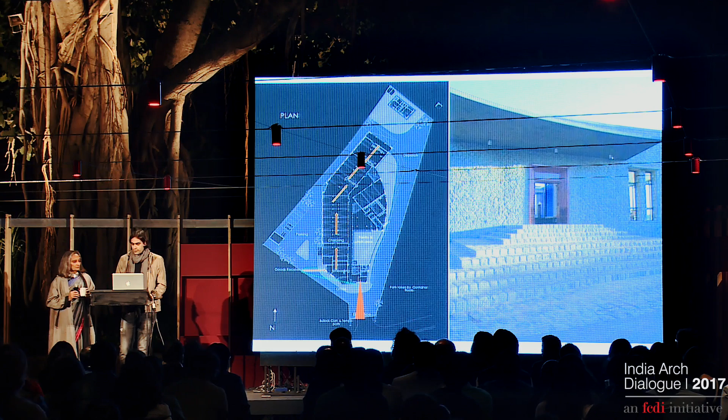This is an example of a bullock cart where some of the local materials were actually transported to site. And I think besides the understanding of devices and material, there was a very clear representation of a linear workflow and a functionality that's represented through the linear site and how material enters through one end, has a very logical movement through the space, and then exits as a finished product at the other end.

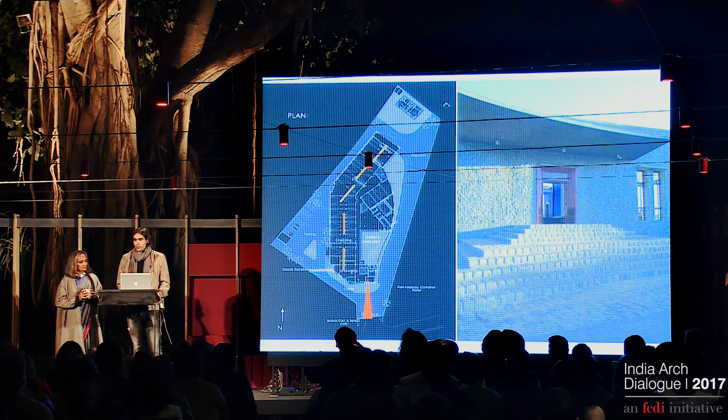The extensive use of the local rubble masonry, again, building with local material, with local labor, and the use of the traditional vaulted systems with the local terracotta bricks.

Again, when we come into, and I'm going to expand here, Shimul, sorry. We always consider industrial architecture and factories and warehouses to be the sterile subject, but when you're able to combine the functionality and workflows of those with a very strong connection to vernacular expression, you land up with some very, very rich spaces and solutions.

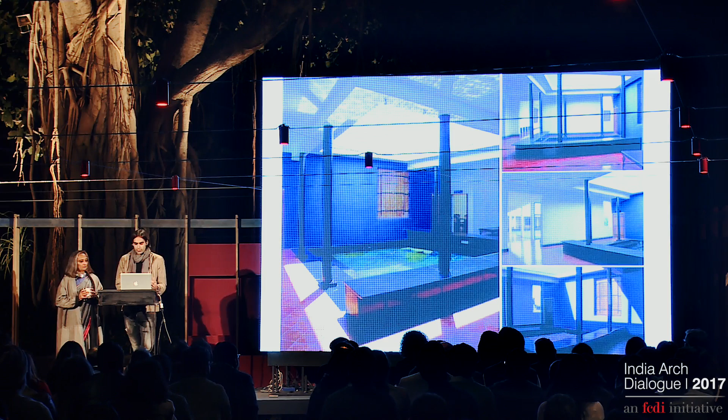And you can see that the courtyards that develop within the project, the way they bring light into the space, they create pause points. The water body is actually a rainwater harvesting mechanism, and it's quite wonderful, the quality of light that just filters into the space.

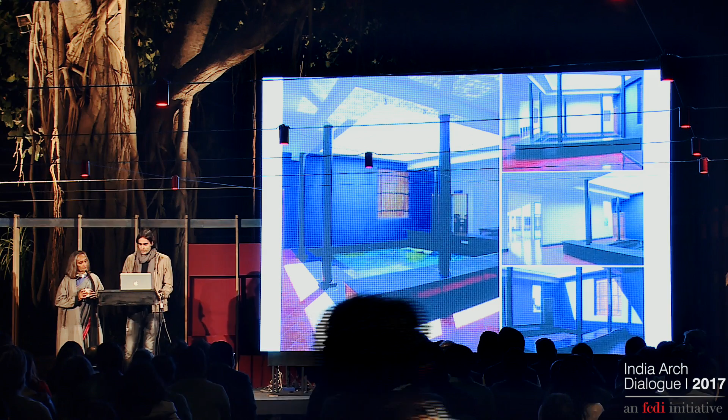On one hand, we had the rubble masonry on the exterior of the project, but towards the interior, where the human interface became more exaggerated, it was softer kind of plaster with cooler whites. Even the doors and windows were built with the help of local ironmongers using locally sourced wood. So everything somehow seems to stem from the region.

You can see the finished space where, with the monitor lights being very close to the equator, we know that the north light is something we need to harness within the internal space. But also ventilators would then exhaust the space and let the hot air flow out. So again, something that's completely sympathetic to the environment.

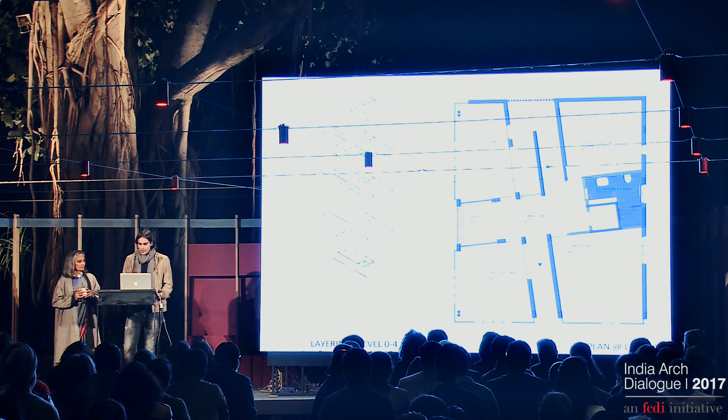It's an advertising agency, and I think somewhere there was a commonality in thinking that real creative thought and collaboration doesn't need to happen within walled rooms. It happens more in the central space. So you find people sitting on these steps, crossing each other, discussing ideas, little balconies overlooking the steps, and it becomes both a thermal device for ventilation as well as bringing light very deep into the center of this space.

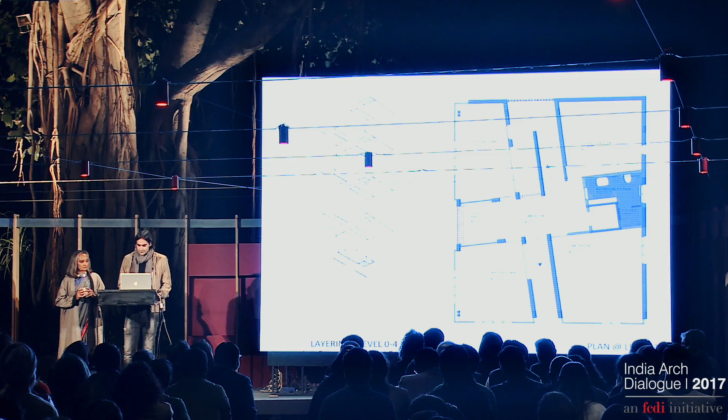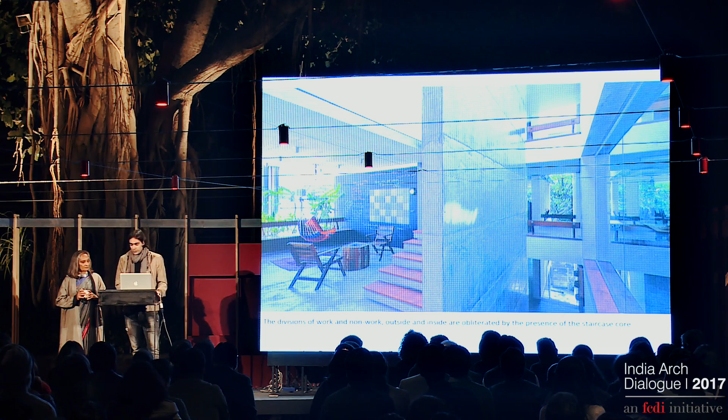The cast concrete walls become the primary structure of the project, so there's an honesty both of structure becoming the primary aesthetic of the project. No false ceilings, the slabs as they're cast are left as raw concrete. There's a certain amount of thinking and intensity and rigor that goes into even leaving these spaces exposed. So overall a certain honesty of expression, not relying on appendage and artifice to develop the aesthetic value of the project.

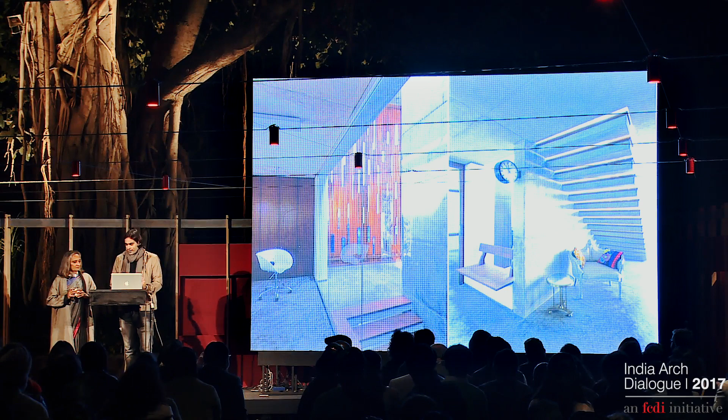You can see on the right the way the stairs are configured, a heavy material yet being quite light, and the way light filters through it. On the left, you can see a 16-foot tall jali panel configured with wood and acrylic, and each of these 6-inch strips are actually operable to again allow different conditions of light and ventilation to impact the building.

And that's one of the executive suites. You can see the beautiful trees outside. A very, very simple material palette in terms of the IPS floors and the raw concrete, the use of wood, the use of color through the upholsteries, the way the walls can move and turn.

I think that's something that's very strong about the practice. They have this wonderful ethos of detailing with simple materials, but with a very rich interpretation of tradition and craft that comes into every one of their projects.

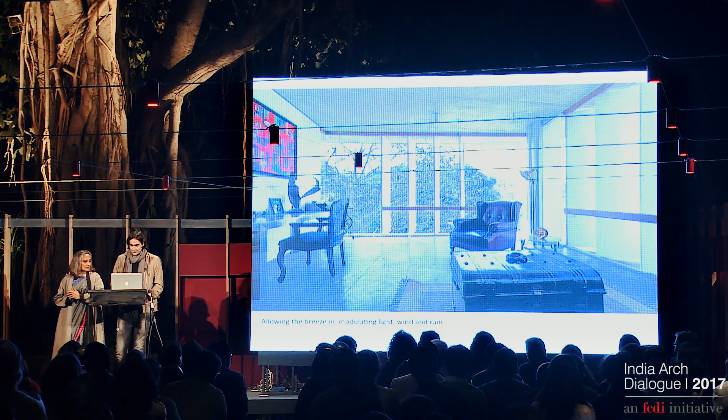I think, in a sense, an expression of the same. It's just the beautiful quality of space.

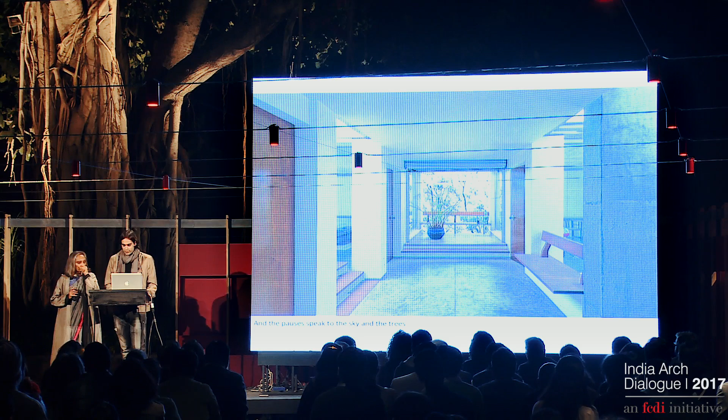The louvers were made out of acrylic polymer, a material that hasn't traditionally been used in an external wall setting. Four louvers open with one handrail and can be placed at different degrees. These wonderful pause points become an extension of the courtyard, where informal discussions can take place, and just quiet spaces for introspection.

Our office is such. We're here to work, and sometimes we do. We play FIFA or race a car, but you just can't blame us. Our office is such. Our days start at 12 and nights never end, with the wind so soothing and the place so pleasing. You just can't blame us. Our office is such. We are Nirvana Films, and we love our new office. Pure production bliss, now in a new outfit.

This project I actually know quite well. This is a house in Alibag. For those unfamiliar with Alibag, it's connected to Bombay through Navi Mumbai, but most people tend to access it by ferry, and it's quite wonderful to have that sense of departure from urban chaos into a more rural setting.

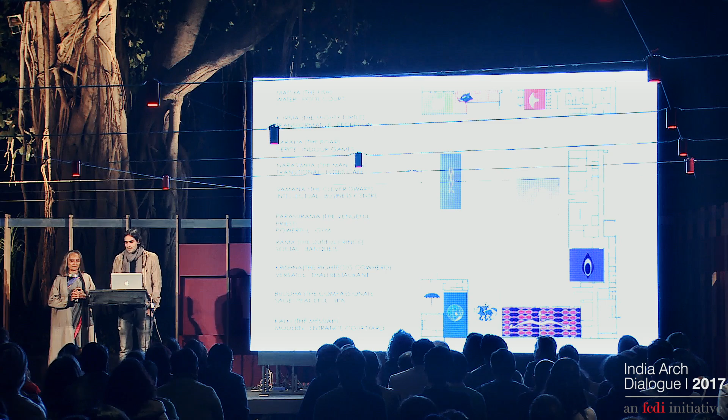This is, again, a very well-documented hotel, featured quite extensively. A hotel in Tirupati, and I think we're all quite familiar with the fact that a lot of religious pilgrimage sites are anything but catering to the idea of spirituality or the peace and introspection required of those sort of spaces.

They tend to become quite chaotic, and somewhere, in terms of trying to create a space very close to the pilgrimage site, the main Tirupati temple, we tried to create a space of reflection, tapping into both the spiritual philosophy of the space and the physical structure of the temple complex—being walled, introverted garden with orthogonal layout, circumambulatory spaces, with the center being a space of meditation, the courtyard, and especially the center being the lotus.

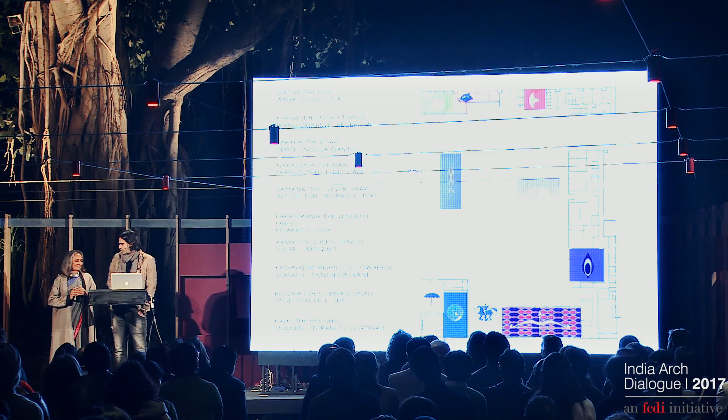There's a lot of significance in terms of the culture of that place and of the temple in particular. On the left are the 10 avatars of Vishnu, used quite subtly in the interiors to develop different devices and aesthetics for different spaces. I don't quite remember the specifics, but I know Ram, the social animal, formed the banquet space, and Krishna, the playful, formed some elements within the dining and primary interactive spaces.

But I think the real strength of this project is the quality of meditation and the meditative quality, as well as the reflection—just the silence of the water, the slenderness of the columns supporting the primary circumambulatory walkways, the horizon, the very interesting form of the central temple, the lotus that forms the central pavilion sitting in the water.

So yeah, you can see the rooms forming on the left, again looking into this courtyard. It all revolves around this reflective water sheet, and the form of the lotus, very cleverly engineered with a combination of steel and decking, then used with a softer material with veneer on the underside. That's right.

I think you can start to see the relationship of the forms to the hill, the wonderful scale of the wall to the right, the kind of tessellation of the lotus, taking the traditional form and, in a sense, bringing it into a contemporary context.

And this is one of the spaces—I think this is where the Krishna-influenced restaurant came in, with the patterning and the colors. Yeah, and that's the underside of the pavilion. It's quite a special space over there.

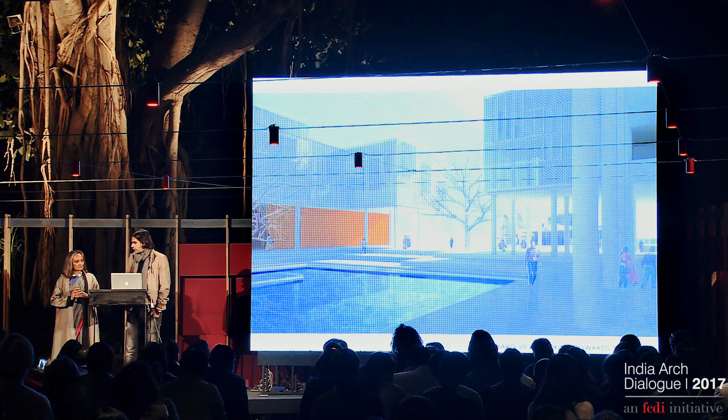Everything here was built around sustainable design techniques, right from the construction to the climatic performance of the building, with screen systems, water bodies, and evaporative cooling, with orientations and wind movements. So water tends to cool the breeze as it flows over, and then it flows through the screens, and whenever air moves through those tiny screens and expands, you get that further cooling effect.

There was very little use of electricity, if at all, because that, I think, is again a part of the more rigorous sects tending to shun contemporary technology and electricity. Yeah, so this was one of the driving forces behind the project. That's right.

But yeah, I think this is a wonderful space, where thoughts and ideas and the spirit can flow seamlessly through the space. Am I missing anything here? No? Great.

This was an admin and training center in Latur, for a sugar production company where they already had all their production and growing facilities on site. This was a project that needed to be added in there. One second, it's the last project.

That's a little bit hazy, but okay. So I think going back to the foundational roots of the practice in terms of understanding the vernacular, and the location of this project in the Deccan area meant it's very close to Aurangabad and Hyderabad. The influences were many, both historically and socially within the region, and that translated to a very specific language developed culturally on the site itself and in the region.

So the first point was to actually study that language. They had these very specific and very unique arches that were part of the language. I think this describes the proximity to regions of diverse cultural influences, and you can see it's a very specific language of the arch, of the color, of the kind of ornamentation and signage they use in that space.

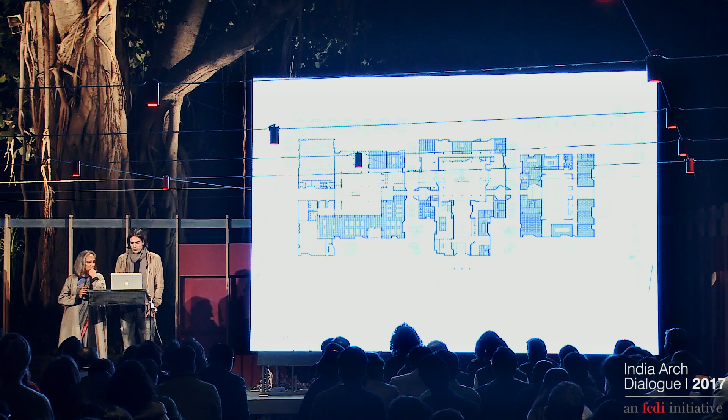You can see a better understanding of the central administration block, the research training on the right, and the common facilities and dining to the left. Everything formed with the traditional vocabulary of the courtyards, the shaded walkways.

Something to add in? No, I just want us to move fast. And I think that gives you an idea of the massing.

Again, very important to note how these blocks are insulated with very solid outer walls. The fenestrations are perfectly choreographed, and they are also thickened, and the walls are oriented in a way to shield from the south and west sun and then let in more east and north light. So very few openings, just to keep out the intense sun.

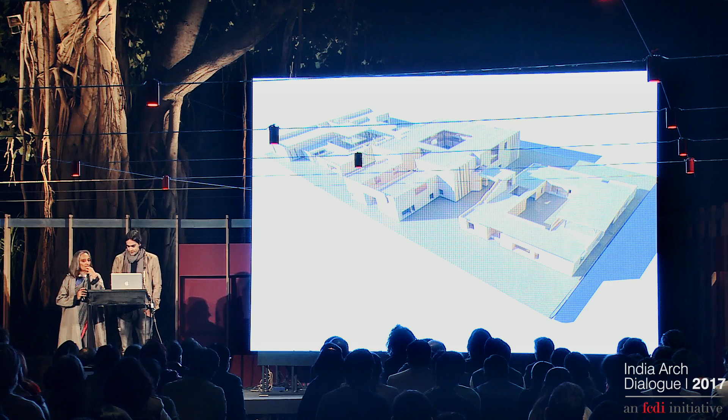And you can start to see the sections operate, and there's a very interesting language towards the inside around the courtyards, where the traditional arches have been reinterpreted as very light steel elements that hold up the primary circulation spaces which overlook the courtyard. So again, you see these resonances with history permeating through the project.

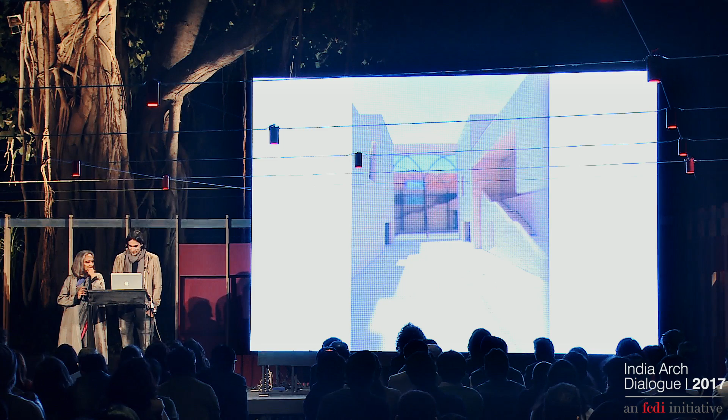And I think with all of Shimul's work, you're going to see a wonderful development of texture, light, and the sympathetic and sustainable environment developing through here. I hope to see this up very soon, Shimul. It's under construction. Thank you very much.